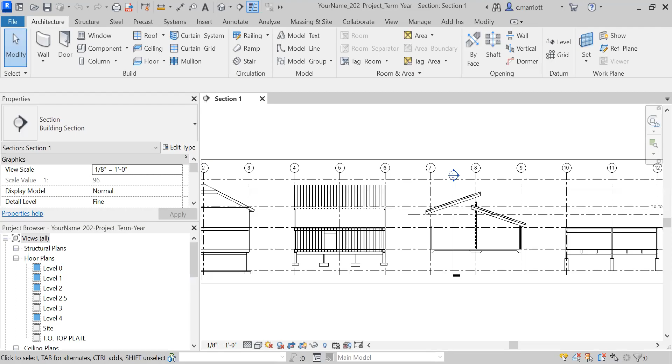In this video, we'll continue adding the structure for this third building structure made out of light gauge framing. We have these columns. We've got 3 of them in a row here. And I think I'm going to raise them up so they're just below the roof assembly up here. We'll be bringing in some beams, and I think it'll be better to frame into the column as opposed to setting the beam on top of the column.

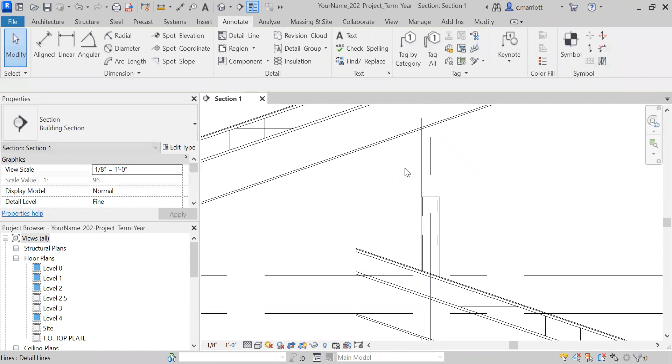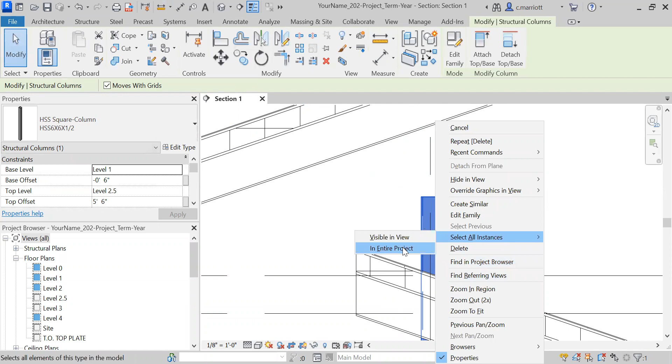So I've clicked on one of them, but before I do that, I'll show you how far up I'm going to move them. This one here, I'm making just a detail line there temporarily, and I'm going to measure here. So 1 foot 9.5 inches to the underside of the drywall. I'm going to raise it up by 1 foot 9. So I've clicked on the column. Now I'm going to right click, and I'm going to select all instances in the project. There's only 3 of these, so I'll get them all at once.

And I'm adding 1 foot 9 inches to the top offset, which puts it at 7 feet 3 inches. Okay, great. And then I'll be ready to add the beams.

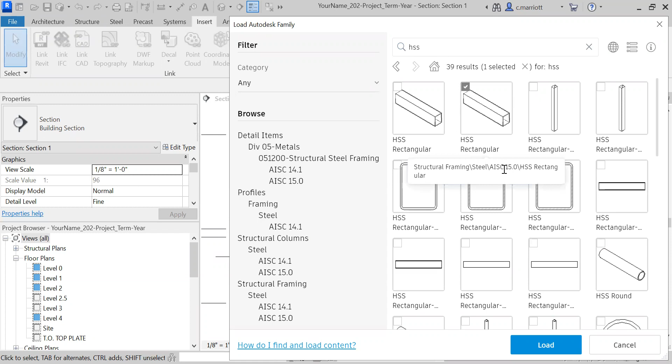Okay, so for the beams, I'm going to first go to Insert, Load Autodesk Family. And using the same HSS term that I had searched for before, I'm going to click on this one right here. This is the 15.0 version, and I'm going to click on Load. And I'm looking for a beam that is 12 inches high by 6 inches wide. I want it to be the same width of the column, so it frames into it really nicely.

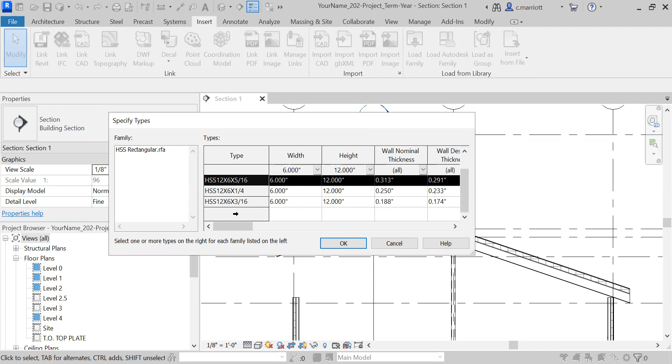So I'm going to click here, and I'm going to look for all of them that are 12 inches, and then I'll look for all of them that are 6 inches. There's 3 of them. Let's go with this top one right here, 12 by 6 by 5/16. Click on OK. All right, now one of them will run at the top of the column here. So I'm going to associate it with level 2.5.

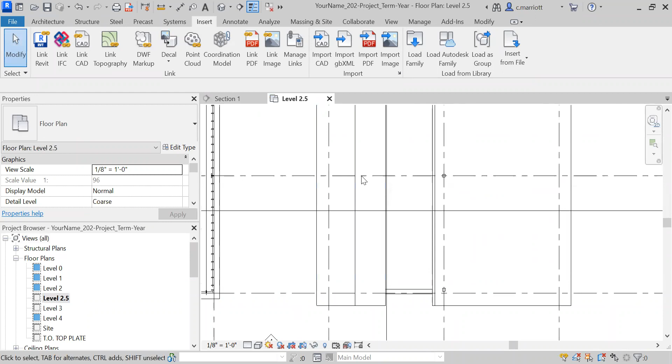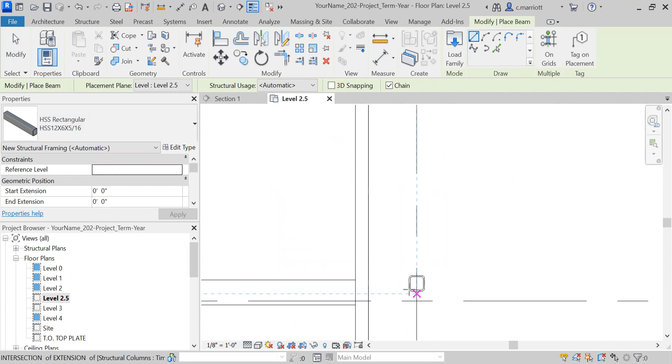And I'm going to go to Structure and to Beam. And there's the new tube that I've just brought into the project. Right now, I'm not set to fine, so everything is reading as one line. I changed it to fine, and now I can see the thickness of the tube that I brought in as a column. I'm going to click here, and I'm going to click here. And I'm going to press enter.

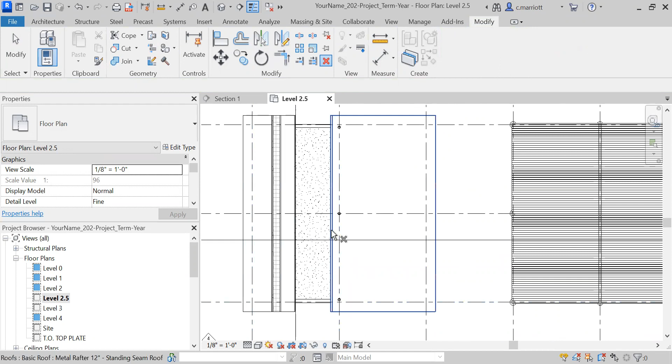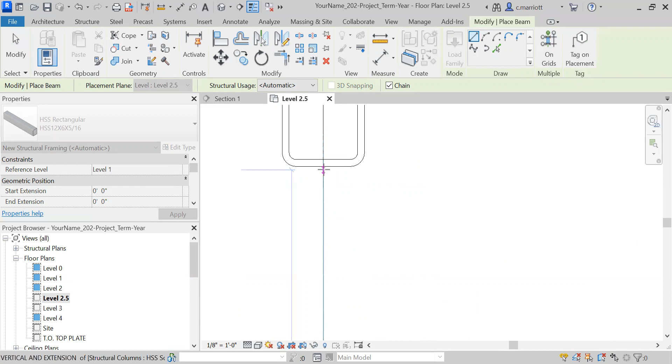Now it's not going to appear because it's probably below my view range line. So what I'm going to do now is I'll go ahead and add the one that's going to be next to it. And here's the beam. Here, click in the same relative position. Same thing over here, enter, and let's take a look in my section 2, or maybe section 1 would be better.

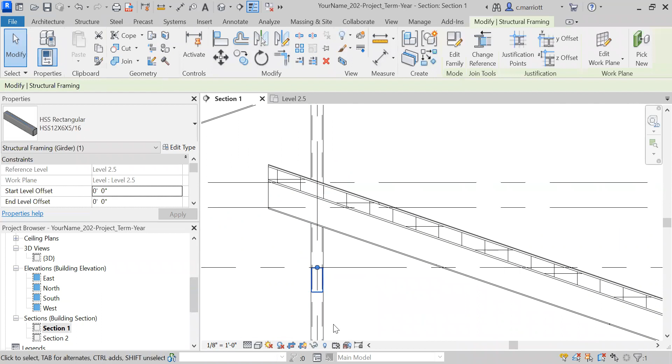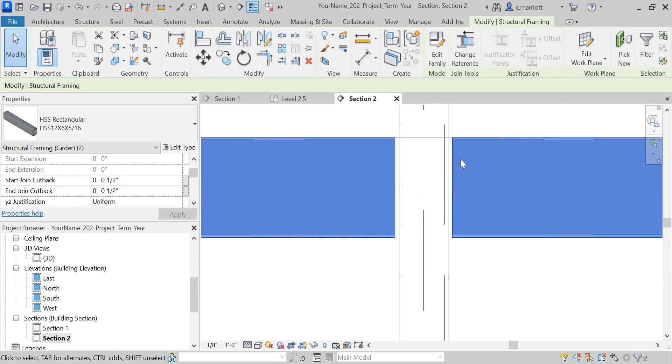Okay, so it put it relative to level 2.5. That's what this one is right here, but I want this one to be up at the top here. So I'm going to raise this one, and I'll move the other one. Maybe we'll do it all at the same time. Go to section 2. There's the one, click on Control, click on the other one, and you'll notice that they're being held off of the column by ½ inch. That's fine. I would presume that has to do with the connections that would happen between the two.

All right, so what we'll do is we will move this one, start level offset. It's going to be that same 7 foot 3 inch dimension. And this one also 7 foot 3 inches. Apply.

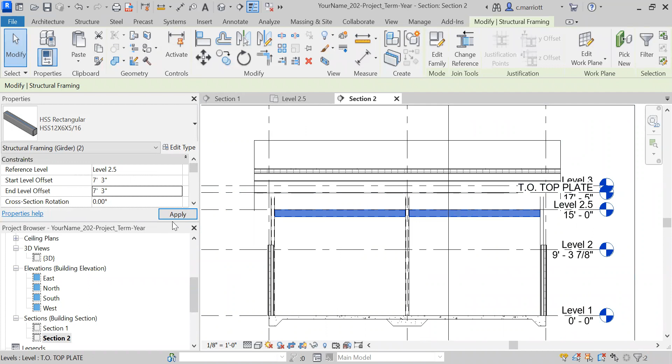Let's go to section 1 and see how they look. It's located at the top of the column where it should be. Now what I'm going to do is associate two of them with the lower roof and then move them up also 7 feet 3 inches. The reason for that is because my pitch is the same, so it should have the same relationship here if you work through the geometry.

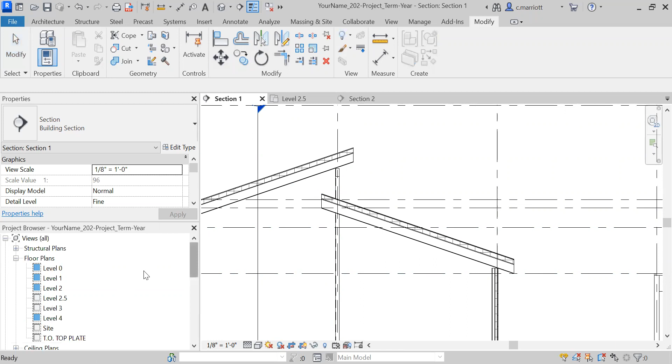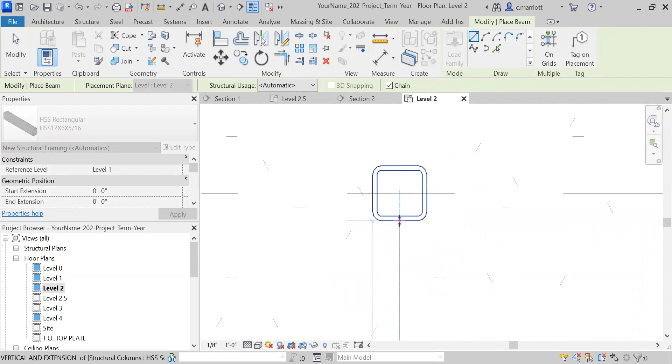So level 2, go to structure and beam. Again, I'm going to change my detail level to fine. Click here. Click here. Repeat. Here.

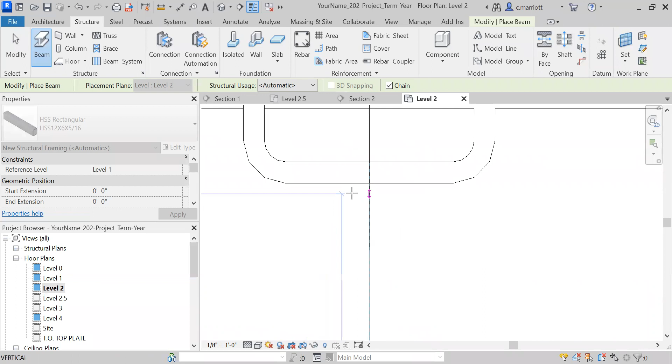Okay, a few more things we need to do to finish up this part. One of them is my walls are now kind of floating underneath the roof, and I want to join them. So I'm going to click on a wall and attach it to the top base. You can see that one is now joined. I'll do the same all the way around. Click on this one, attach it to the top. Now for the side walls, I need to attach them to both roofs here, and it's going to create a kind of an odd condition.